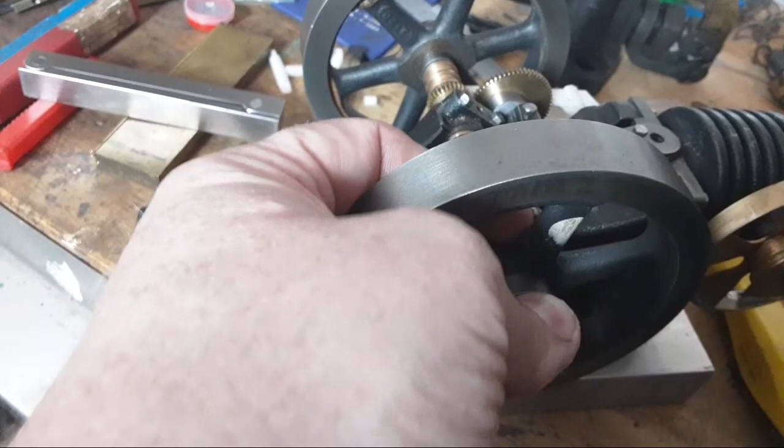This one, I ended up rebushing again for about the 6th time. And it's a fraction loose. It's not terrible, but this key doesn't tighten up. So you're gonna have to make a new key for this one.

Next job, I guess, is to bolt the cylinder head on. The head's had a bit of a job done on it. I don't know if you can see that. You probably can, you probably can't. You're not supposed to see it.

Drilled these 3 holes and didn't think it through as well as I should have, and really drilled them wrong. 2 valves and a port for the spark plug, which goes between these two. And then there's one valve here and one valve there.

This one turned out alright, but these two really weren't good because I only did them in the dividing head and the milling machine, and that's not how I should have done it. So...

What I ended up doing was make a top hat sort of section piece of cast iron to press fit in there, nice tight press fit through there, and then it's got a top hat section with a bit of a lip, so that it actually seals on the front of the cylinder. So...

That repair's been done, and what I'm going to do is set this up in the dividing head and just put an index mark on the 3 spots. Probably drill the spark plug hole through anyway, because it's just a 1/4 inch drill.

And then I'll make a mandrel. I've already made a mandrel actually, with bolts on these 3 holes, and set it up in the 4-jaw on those 2 centres and bore them through, or drill and ream them right through, and then machine the seats on them, and they should all be concentric.

The push rod looks like this, which is just a piece of square or a piece of rectangle with 2 brass guides on it and a fork on one end. I've actually got a huge big ball race to do the roller, so that might be a good way to do that.

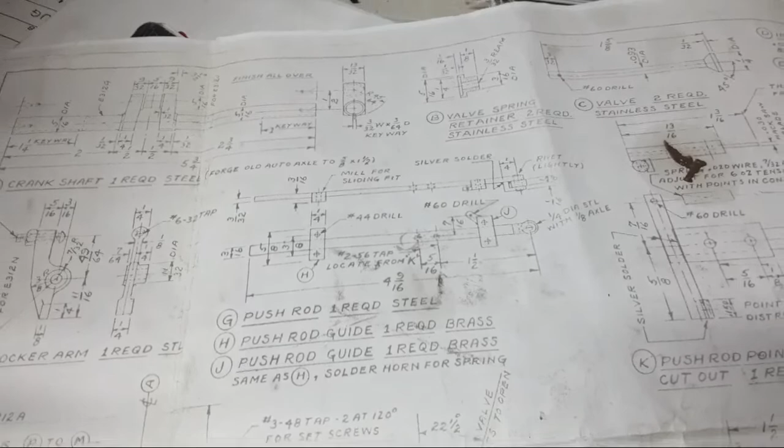And 3 AM for the live stream's crazy, Frank.

A very excellent set of parallels there that John Creasy made. Just shout out to him, because they really are very good and get used all the time.

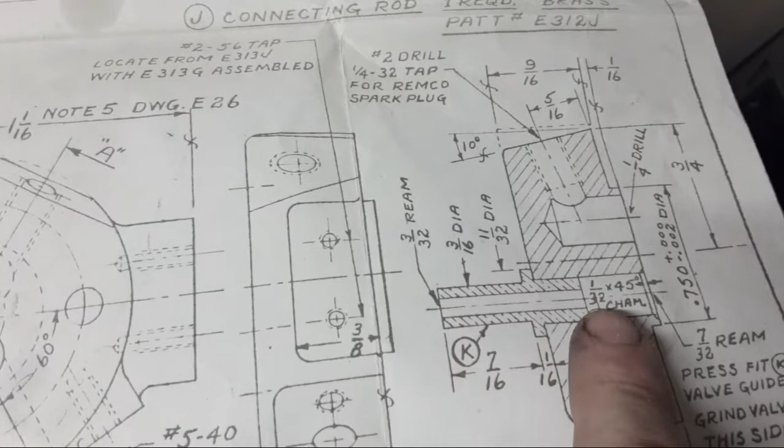This drawing's upside down. There we go. Cylinder head drawing. So coming right through, there's 2 holes here, which is 7/32 or some stupid size. Then there's 1/32 by 45 degree chamfer for the seats.

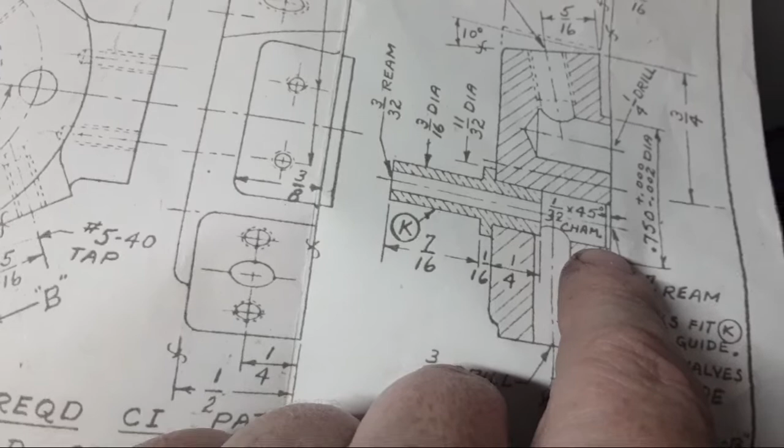And then this has got to be concentric. Go Create. Hi Nigel. This has got to be concentric too. So this is where it gets complicated, because this surface here and this hole need to be concentric, because this hole here needs to be concentric in the middle of this one. If they're not, then you get valve leak, as anyone who's ever built one of these knows. And I'm sure we've all built one that doesn't work.

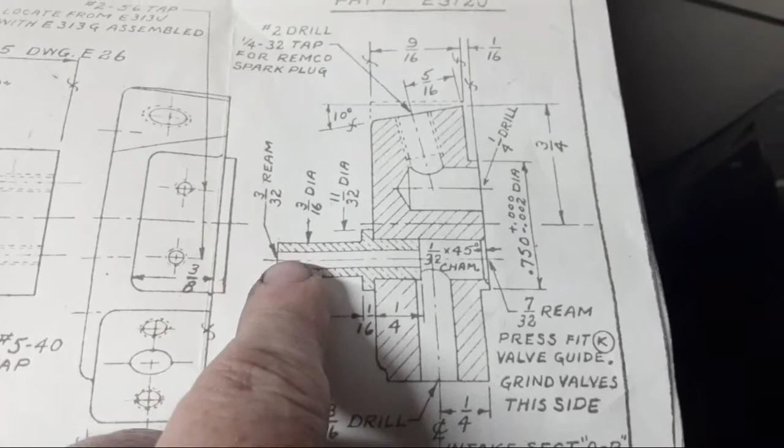So I think the best way to do this is to get this piece and drill it all the way through and ream it, a 3/32 reamer. Then set it up between centres with a little dog on it, and machine this side to press fit size, accurately, between centres. Turn it around and machine the other one. So I think that's the way to do that, and then press them in. So if anyone's got a better idea, good on you. And share it with me by all means, but at this point, that's what I'm going to do.

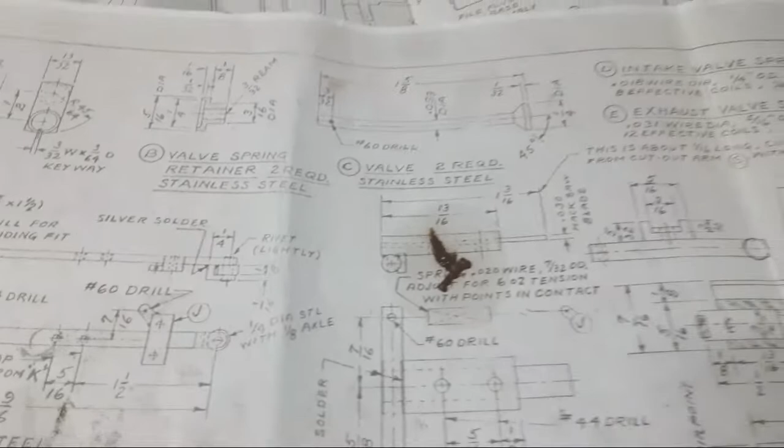If we get those in there and a few holes in it, then the head's basically finished. And we can move on to other extreme atrocities, like these valves. Not got a great love of machining something 3/32 diameter, 1 3/16 long, but I guess it was the first time for getting everything right. Anyone who's got a better idea on that, you can make them up out of 2 bits and then remachine them, but doing them in a collet's a bit of a problem. I think they're best done between centres too, because I'd like to set them up twice.

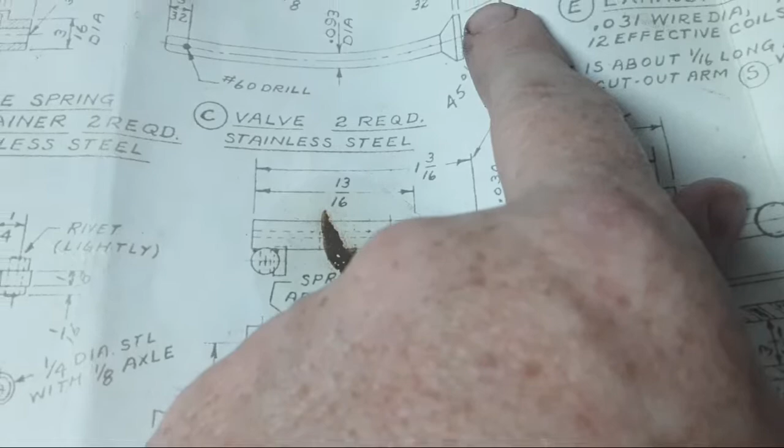So with the Lorch, this has got to be machined with the compound. So I'd like to get them both right here, between centres, the right diameter here, and then swing it round to 45 degrees and finish this detail on the end. And then put them in a collet and machine this end off and this end off. So that's fun. And then there's a couple of those little collars there which hold the pin in place in the spring. Anyway, then we can pressure test it, I guess.

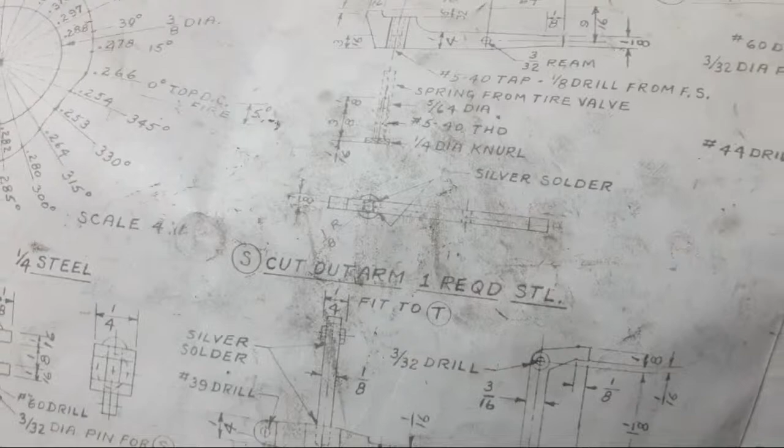I spilled Vegemite on the plans. I don't know what that is. I reckon it's grease or something that's probably been in it. It's probably even part of the... I don't think it's part of the photocopy. It might be a moth or something that's squashed there. I don't know. Could be Vegemite.

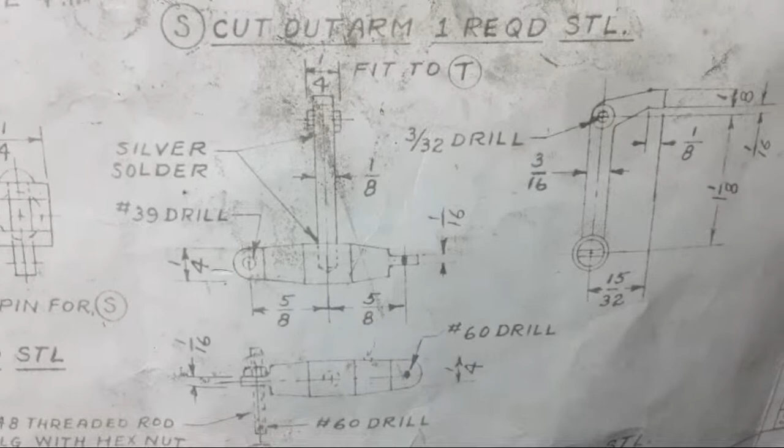So there's a fair bit of work in it yet. There's this rotten little cutout arm here. It's got to be made. And there's this governor weight yoke, which isn't fun. And then there's some governor weights that look a bit like this. And I think the only other bits on this particular drawing that we haven't made are the rocker arm.

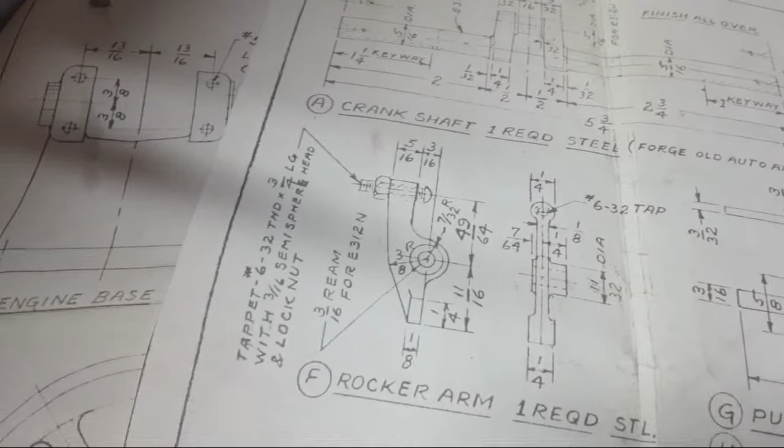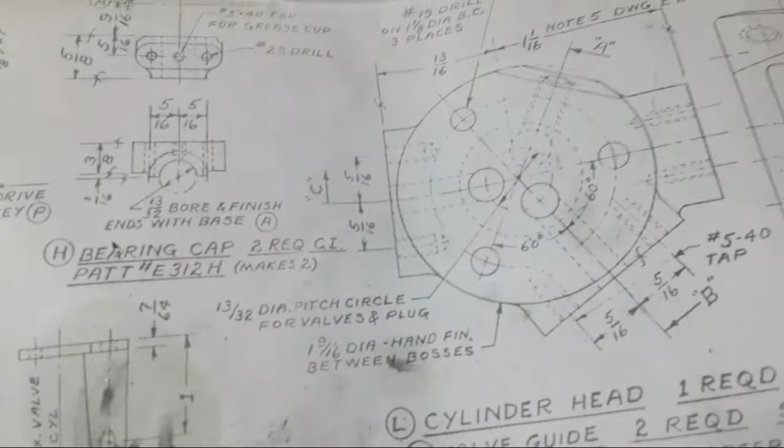And the points and catch plate and everything there, which goes on the push rod. This one goes on the push rod, and this one goes actually onto the block with the spring in it. So a bit of work in all this stuff. It all sounds pretty quick, but if we've done that, the only thing to do on this particular drawing then is this atrocity here, which is the rocker arm.

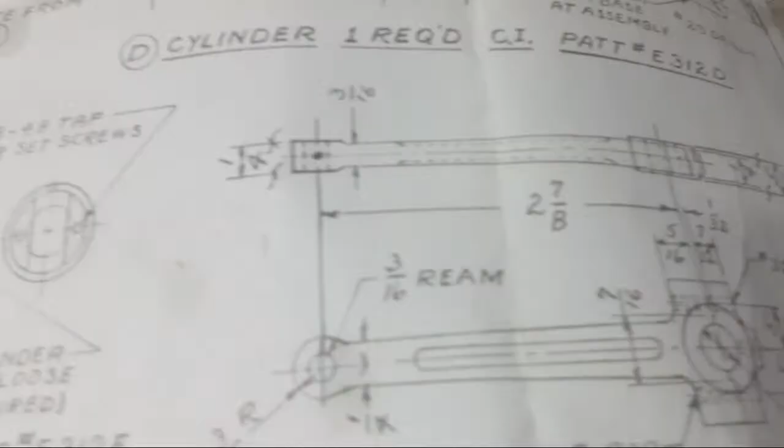Rocker arm bracket. One required, brass. Oh, brass isn't so terrible. We can make one of them out of brass. And this bit, which I'm not really in love with as far as a thing to make. And this bit, which I'm also not in love with. Before I do that, I've got to run a lap through this cylinder and make it nice and parallel.

So, anyway, that's what's been happening there. Two-piece valves are definitely an option. They're fairly long and fairly light, and I've actually bought the materials to make them out of two-piece, but still got to get them concentric, and holding them in a collet to machine the heads doesn't sound like a particularly good idea, but I don't know. Have a think about it.

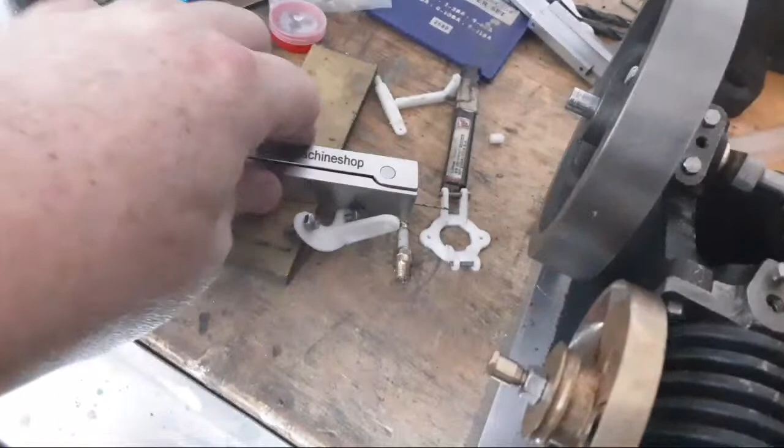There's actually a sine bar sitting there with a drill in it, which I think we're finished with. And I've lost. I completely lost that. Wonder where that went. Crap. Did it fall? Did anyone see where it fell?

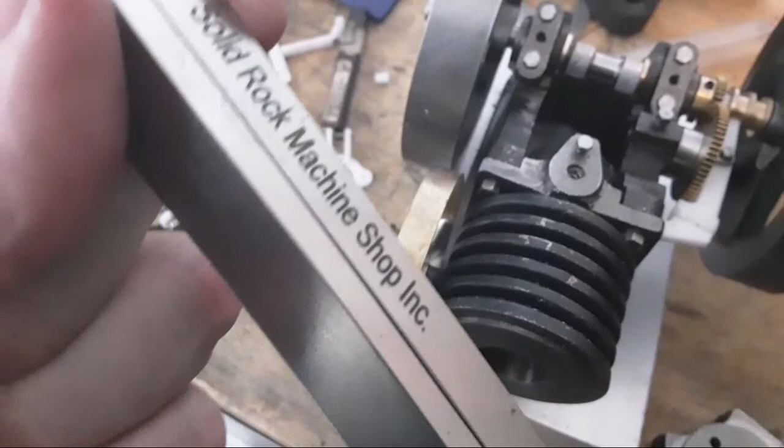There it is. It's out of my number drill set. Any idea where my number drill set is? Yep, zero idea. We're going to put it back in the sine bar. This is my solid rock machine shop sine bar. It's actually seen a bit of use. It does get used quite a bit.

And that drill is exactly the right thickness, or close enough to the right thickness to get them both the same, to set up the tapered keyway in these flywheels. They've actually got a tapered key in there, which is quarter to the foot or something, eighth to a foot.

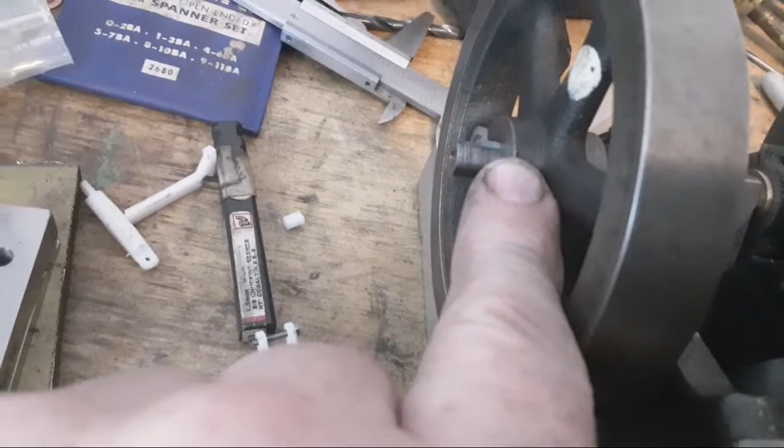That one's tight. No, this is the loose one. Put that there and we've lost it. This one, I think this key's just had too much off it. It's just a fraction loose. So the key's got a taper on it, but so has the flywheel. So the flywheel's got a taper in it as well, to match the key, and that's what keeps them tight. I think that's the secret to that.

So I'd like to think I'm halfway with this, but there's still a fair bit to do. We've still got to have oiler on top, conrod and piston, all the governor bits, push rod and rocker and head and everything. This has got a bit of a wobble in it. But anyway, it's only a pressed in fan. And that runs on a belt on here.

So that's what I've been sort of doing, and probably more than I should. I probably should leave it alone for a bit and go and do something that actually matters. But it's good fun, and it's coming together all right. So while it is, I'd like to keep going at it.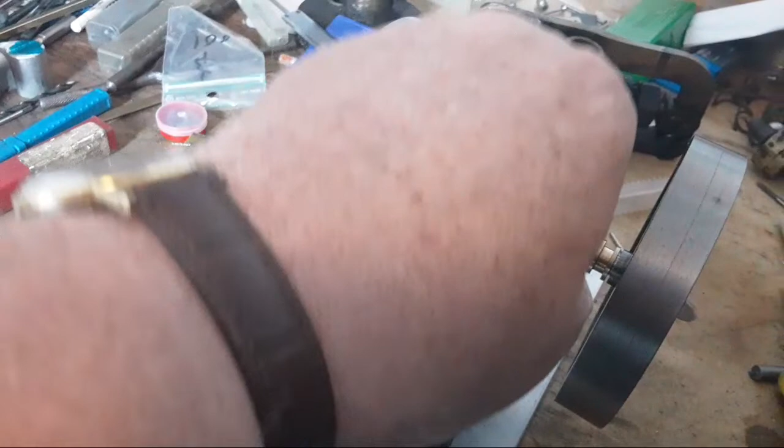That looks better. They need to be stuck in with Loctite or something before the bigger threads will undo easily. Bigger thread than a little thread. I actually just used a steam gasket sealer for this one. This one works. Haven't done this up. So it's just got a little cap on it with a thread in it. And these are just the same. Anyway, it's slowly coming together and it's a big job, but made reasonable.

I think Stefan's too busy. We're all too busy for this sort of messing around. But I had forgotten about the steam engine. I'm sure it's still sitting on the shelf somewhere. Now we're here, we might as well remind him. Touched it yesterday.

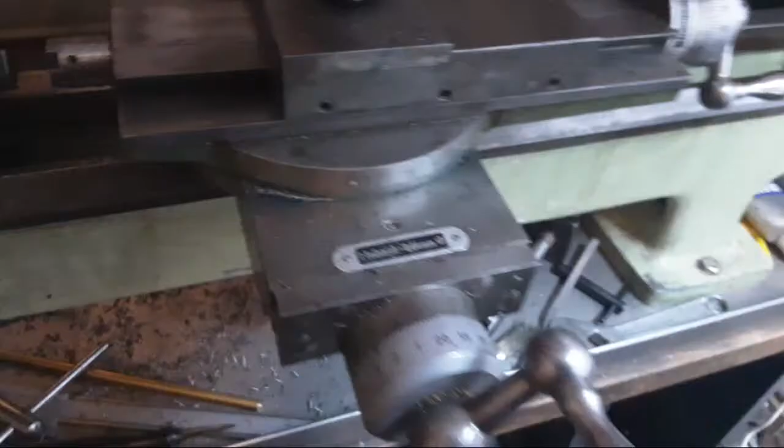Probably don't do this because it's not a good idea, but there's a broach in a tool post for putting slots in flywheels at an angle. I'm not convinced that that's the correct way to do that, and probably you shouldn't do it. So you didn't see it here.

I need a new belt, and this situation's getting a bit dire with this. I ended up putting a bit in it and shortening it up. So this has got that many joins in it now. One, two, three. I didn't tell you to do that at all. You do that at your own risk, but I bet you've thought about it. There are reasons why a leather belt is a smart thing.

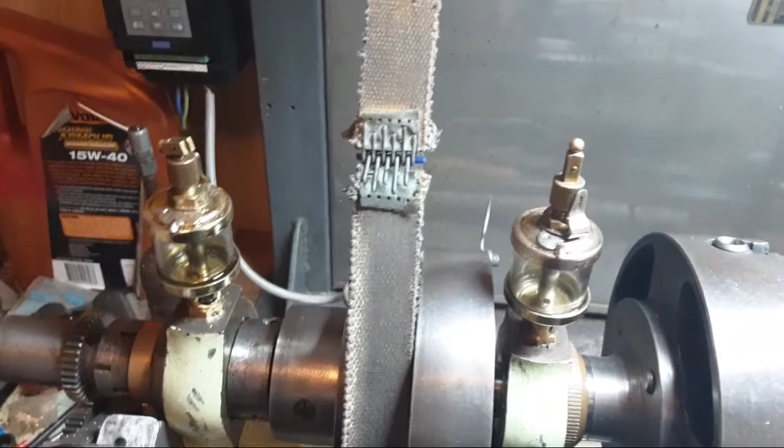That's probably why Bruce was trying to ring me yesterday and I didn't get back to him. So I will ring him and ask him.

There is a product called, it's a very good urethane product called, oh my gosh, what is it called? We use it for leather goods and things, but it's used mostly for horse harness and that sort of thing. It's a composite product. It's very good. And I think it would join okay with this. The issue with putting a continuous belt on it is I've got to pull the spindle out every time I want to adjust it. And there's also no adjustment for tension on this lathe. So we've got a fixed shaft and a fixed shaft.

Tell him to buy one off Myford. They're cheap. Like seriously, so cheap. Yeah, I missed a call from Bruce, and it was the middle of the day yesterday, and I never had a chance. I'll ring him one night.

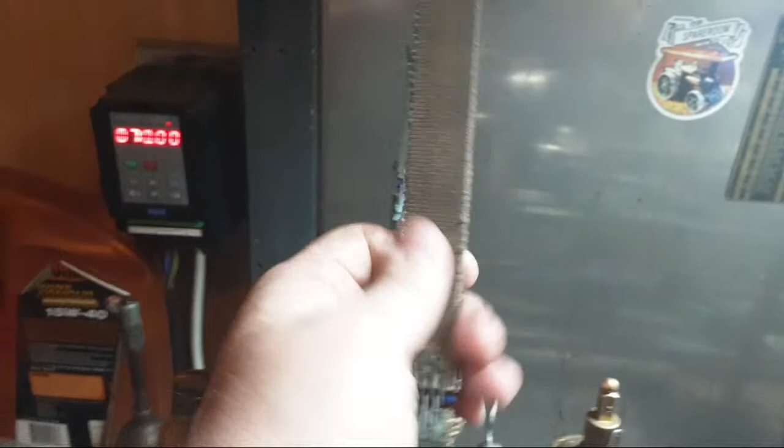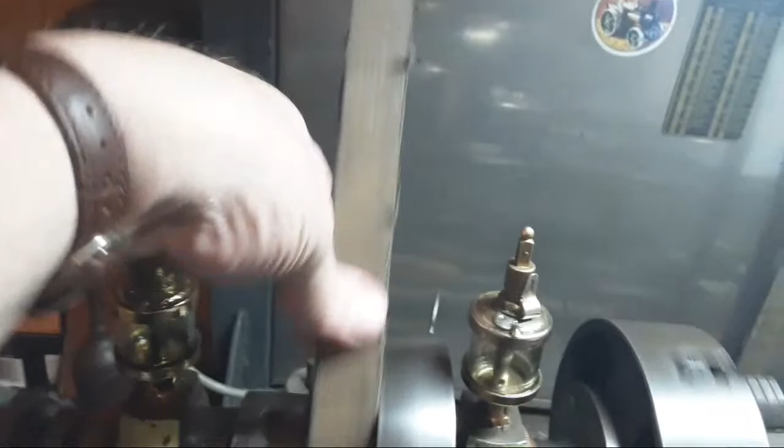But there is a very good product, I think, and I'm going to try that because we can get it readily available, and it's about the same size. It's available 1" by 8. I think it's an American size. So that's roughly the same size as this, and I think it would probably take clipper fastenings okay without too much trouble because it's reinforced inside. So I'm going to try that. Watch this space.

Anyway, I'm going to tell him to go to Myford and buy a couple of these oilers because they're cheap. And as for flat belt, I think we have something, but I'd better do something about that fairly quickly.

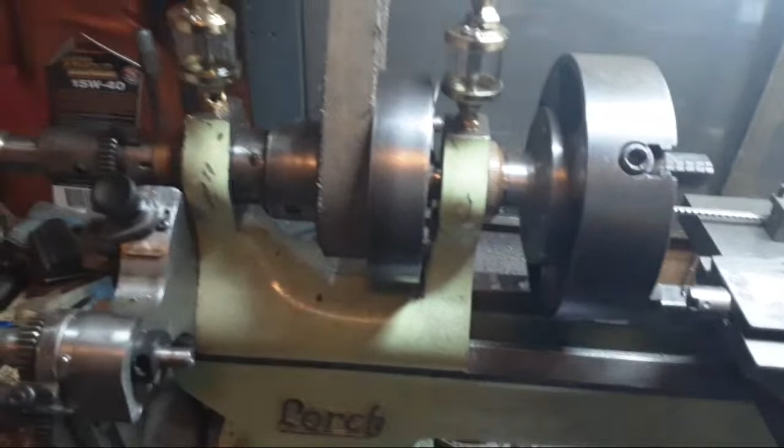I'm usually pretty good with flat belt and I don't mind it, but this one's been joined so many times it's looking a bit ordinary. I don't think I can get a whole lot more out of it. It ended up just busting off and I've sort of sorted it out. It's just rotten, so it's broken at the end of the clipper. So anyway, it's fixable. There are more joints in the belt, yeah.

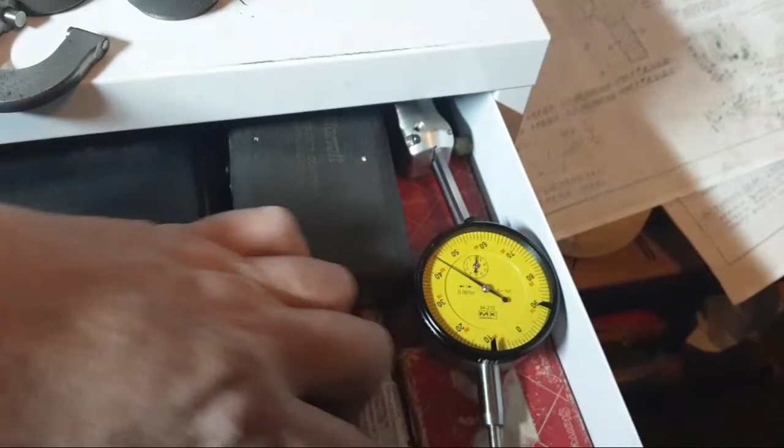So that's where we're at. Really need a new dial test indicator, and I guess I'm going to buy a new test indicator. I've got an MX indicator there. I'm not all that in love with it. And I've got a digital one, which I'm also kind of not that in love with either.

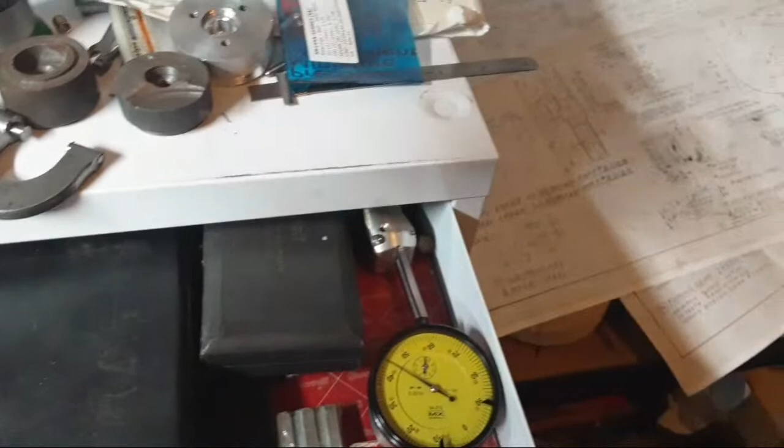I have this, which I don't like, as far as indicators go. This stand here is very ordinary. It's a knockoff of a Noga, only it's tiny. It's made in China. Not really in love with it. And this is broken here. A flat chain.

So I know someone who's got plans on a website for making bits like this for this, and I don't know whether that's what I want to do or whether I want to put a fine adjuster on it and make something decent. This is a Federal indicator. It's half a thou. It's quite a good one. I really like this as far as sensitivity and calibration, and it's a scale that I understand and it works. It clicks through. And it's also reversible, so it's quite a nice little indicator.

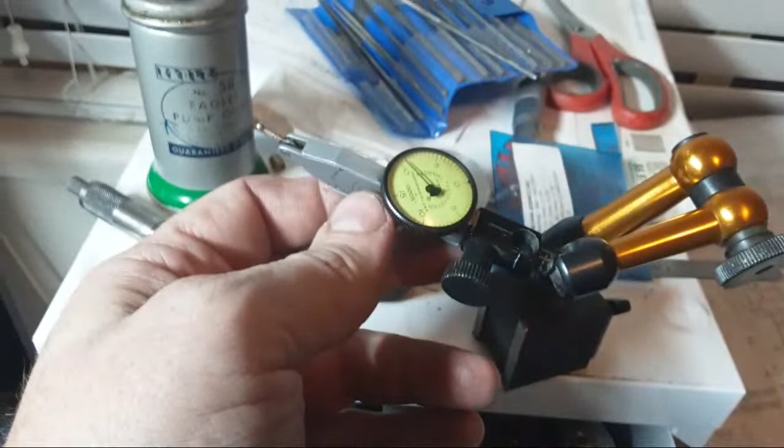But this is bent. I don't know if you can see that. It's got a bit of a bend that way, which isn't good. I don't know whether I pull it apart and try and straighten it or whether we fix it. Put the fine adjust on the base. Yes, I've heard that. Yeah, I don't know if I'd even buy a Noga. This size is very good for me. This is about the size I like. But maybe I should sit down and make one, but it's a project. And that's a bit of an issue.

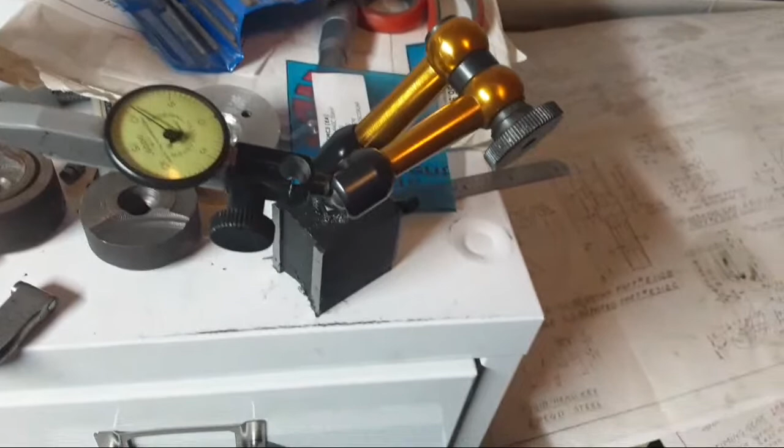This is my measuring tool box. There's an empty box. We could put that indicator in this empty box, I guess, where it belongs while we're doing it. There might be a reason why it's not in the empty box. Yeah, there is too. Yep. That's not really the answer. I don't need another project at all.

These are kind of good. There's one on the bench there somewhere. But these are something I use all the time. They're really good. Someone had a question about small hole measuring. These are all right. But if you want to measure small holes, now this is kind of one of the best things I ever bought, right? They're only cheap, and they are imperial. So apologies to all you metric people. You can buy metric ones.

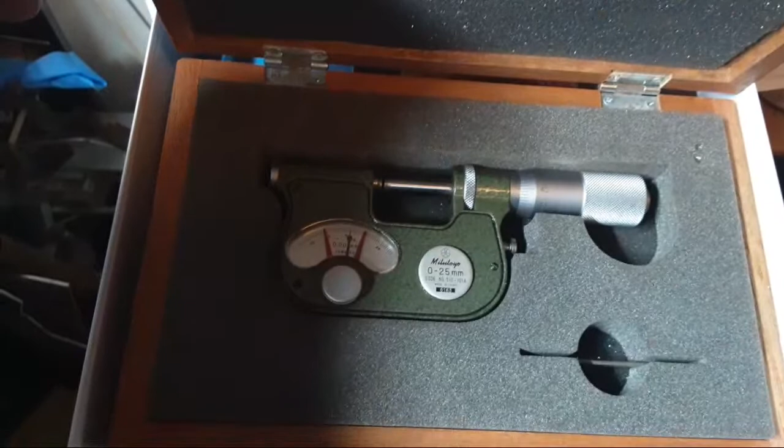If anyone wants a nice microns indicator, I'd swap it for the half thou version. A set of drills is good too if they're nice and clean. But that was a luxury purchase, that set of pins, and I use them all the time, more than anything else. Also be keen to get rid of this, which is neither use nor ornament. Someone's got a museum. Who sells gauge pins? I think mine came out of China. Or actually mine probably came from M&S, but they're Chinese.

For through holes, this is excellent. And where this is really excellent is for things like, you have to get this open. They're 1 thou. Now you can buy different sets, oversize and undersize. I'm sure Stefan would know more about that than me. But they're in 1 thou steps from .061 to .250. That set. And the next set I want to get is from .250 to .500. Or .251 to .500.

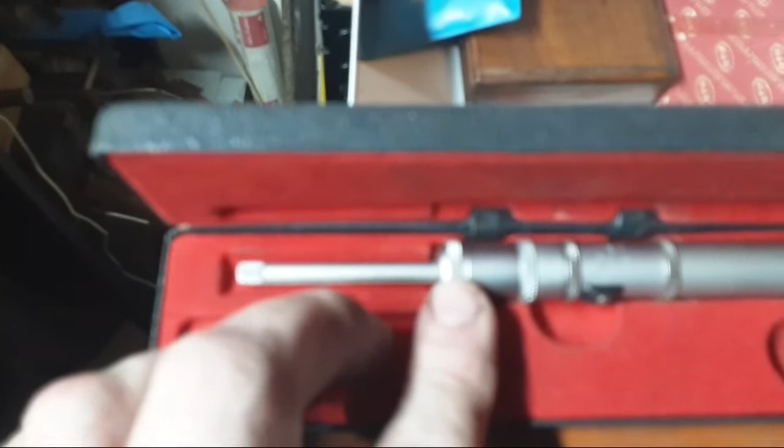This is very useful for measuring crown stem tubes on watches. But yeah, they come undersized and oversized, I think. Really good question what they are. I think they're an undersized set. This is a special micrometer. I guess you've all seen this. It's got a pin and a flat surface.

But this is quite a good thing too, because it gives you the reading on the taper.

Take care, JB. Don't work too hard.

And that gives you a reading in a window. 42 thou. Which is very useful for measuring a watch crown. So there's one of these at work, and I've got another one that belonged to my old man. But its actual use is for measuring spray gun nozzles, in case anyone was wondering.

There's always half a dozen of these poor little imperial micrometers kicking around. This one I don't use a whole lot because it's getting a bit hard to read. It's pretty well battered about. I have a Starrett, which gets used a lot more because it's a much easier thing to read. It's probably the easiest micrometer I've got to read.

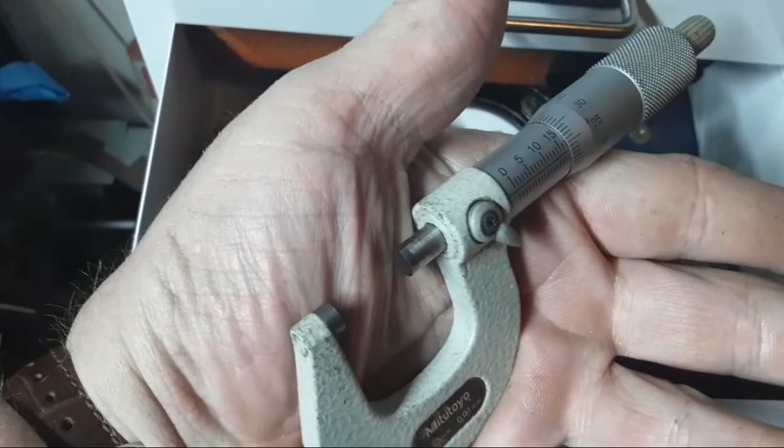I've got a metric one too, which is a Mitutoyo, and that's a dog of a thing to read, to be honest. It's very easy to get mixed up. Because that line on there, and I don't know why this is, someone might be able to answer this. That line, when this comes back to 0 setting there, the line disappears. So you're only sort of guessing which line you're measuring from. It's a very disconcerting thing. Don't know why that line disappears, or it seems to be on the inside of the thimble.

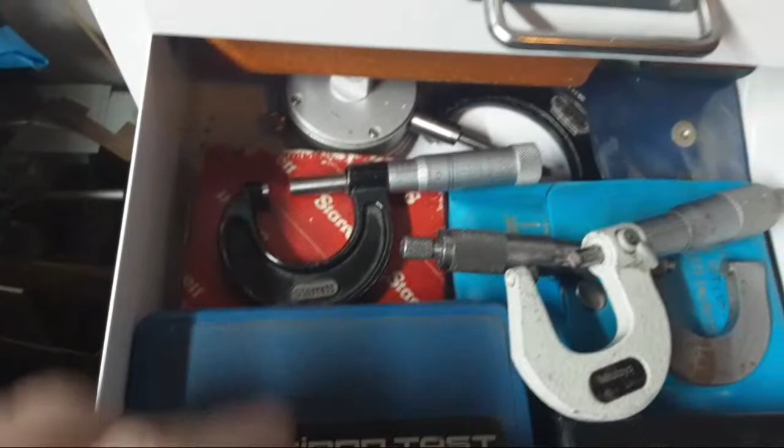I like a decent micrometer. But I sort of feel a bit like I should sell all these and buy a decent digital micrometer at some point. But this is the one that gets used mostly for this sort of work. And this one gets used a lot because the lathe's metric. In the top there's one of these, which probably also should get sold, to be honest.

That's the other thing. Dances with Aardvark says that I'm getting old.

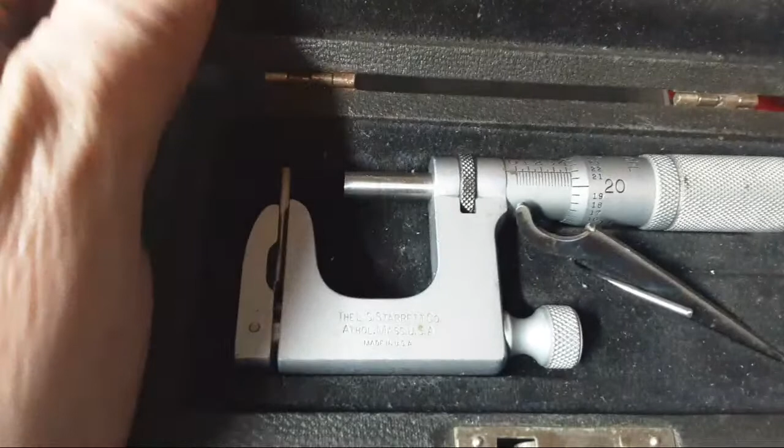This is a pretty nice micrometer, and for a lot of things this is quite useful. I haven't got all the anvils, so it'd be much more useful with a set of anvils. But quite often I just use it with a gauge pin. Is that sacrilege? Probably.

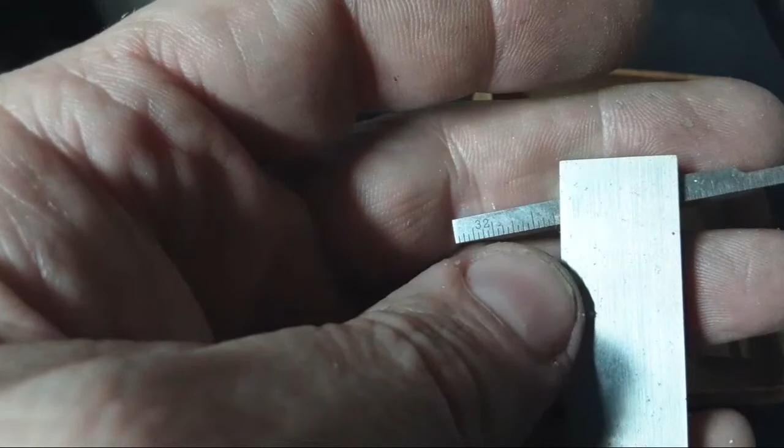A lot of these little red boxes, that's a toolmaker square, which is dusty actually, probably more dusty than it should be. It's a pattern maker square, or die maker square, whatever you want to call it, with adjustable taper. It's a fairly useful thing as well. I use it a lot. Set of radius gauges in the bottom there.

A set of Vanguard angle blocks. They're pretty much useless. My good, that box under there is my good combination square.

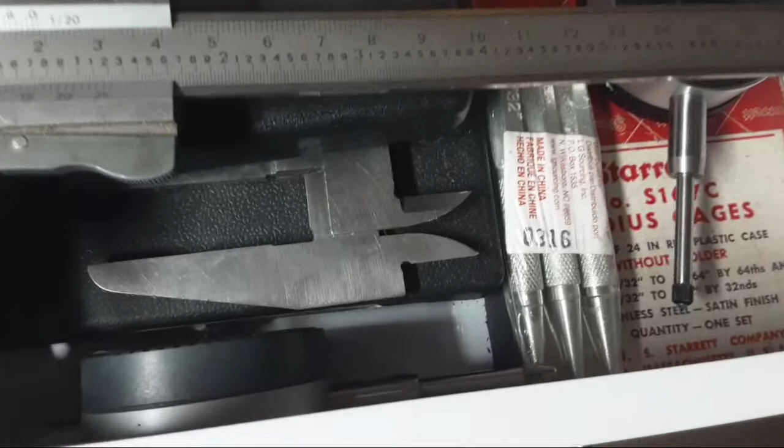I tend to find my go-to is still a decent pair of calipers. This isn't them. These are Minimax. This is interesting. Let's see what else I can find here. There's probably about 4 pairs sitting around somewhere. I won't tell you where these were. It might be better if you don't know. These are Minimaxes. These were Dad's.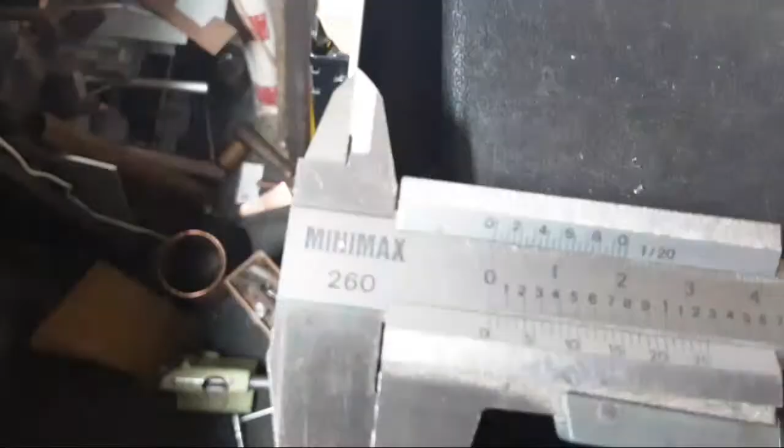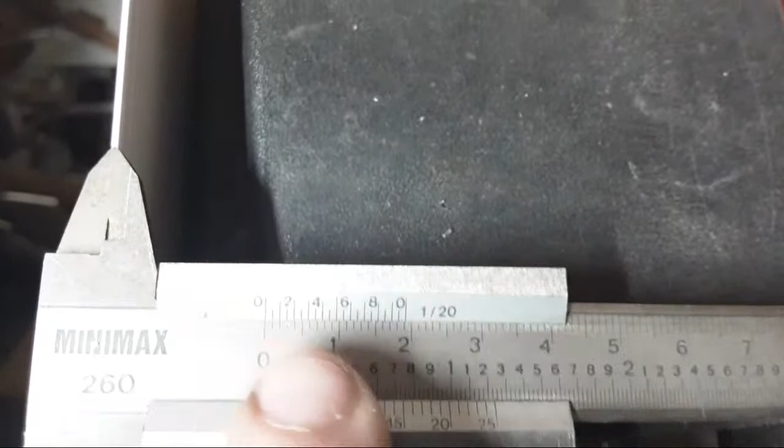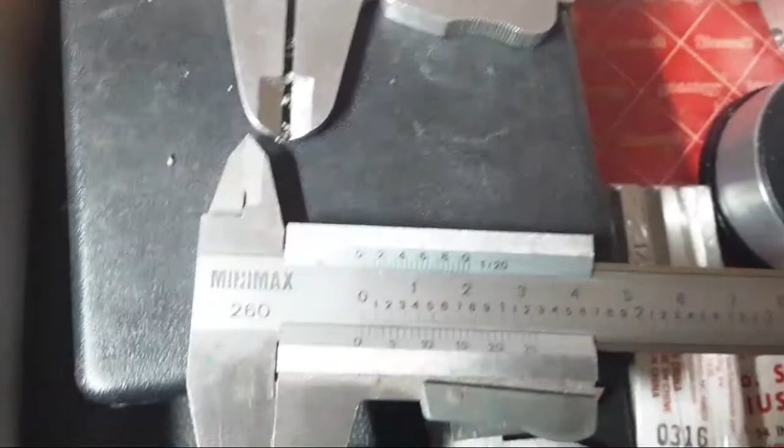Not really in love with these. So they're not a patch on what these are. They sort of look the same. They absolutely look the same. They're not. They're not a patch. The little drawers are okay.

My good set are here somewhere. Just to find them. I reckon they're under these drawings. Yeah, absolutely not under the drawings. Probably over here on the bench. Oh, they could be out on the mill. No, here we go.

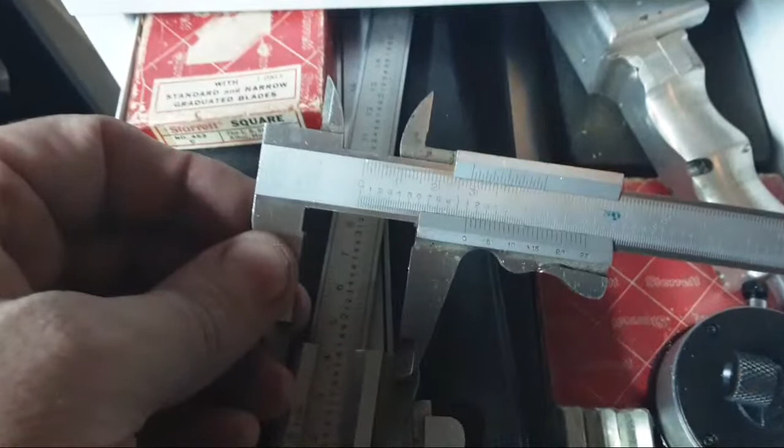This is my really good set, I guess. They're Mauser, from Germany, I think. Really like those.

Morning, James. So that's calipers. Anyway, this workshop needs more organisation. If someone wants to come and do it, you're very welcome to.

This is vernier adjustable, got marking gauge, which was built by a gentleman who entered it into the tool making competition a few years ago. Now I've said that magic phrase, you can think what you like of that, but at this point I'm too busy.

Seem to have a lot of tools that are more or less out of date. Depth gauge, which I depth micrometer, which I use quite a lot too.

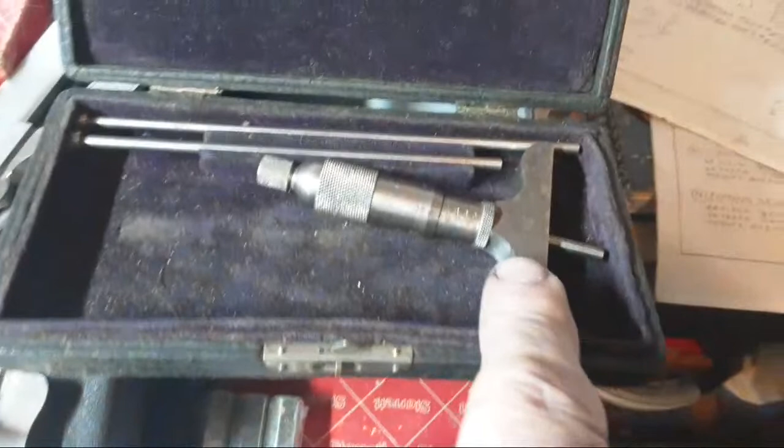I would like very much to make up a Tom Lipton style depth gauge or depth micrometer with a digital indicator on it, and a bar across. That's something I'd like to make. When Joe gets his surface grinder sorted, we might make one of them.

Sounds like a very good thing to have. Much more useful than that.

These drawers, you're right, they drive me crazy. But they were cheap. And when I close them, everything's in there out of sight, which is really nice.

Anyway, that's material storage over there in the corner, sort of. And this is a lathe.

We've run into a bit of a problem with this lathe. It's not really a problem, we're working with it. But every time we want to move the saddle in nice and close, we can't move the tailstock back because of this cabinet. So we've got to take it off. It's a bit of a nuisance. It's not a big job to remove it and put it back on, but we're getting used to it.

Hey Kimber, watched Kimber's latest milling machine video. Hope things look a little bit brighter in the morning.

Anyway, that's what's happening in our workshop.

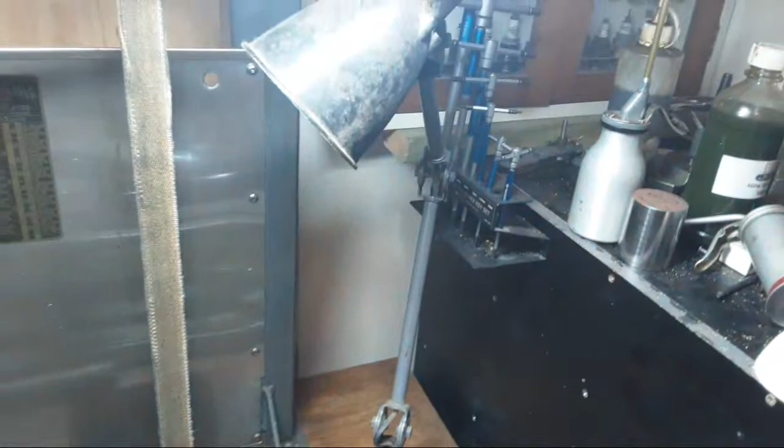Good light's important. This is a really good light. I really like this. It's got a decent arm on it. This one here needs sorting out. It's kind of okay.

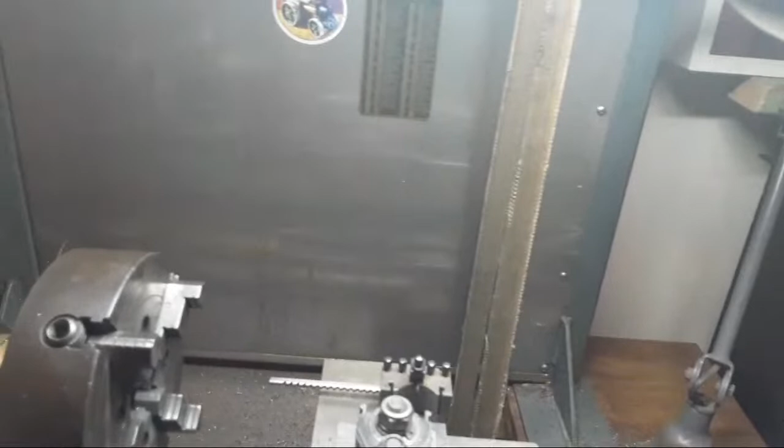And yeah, that's what we're up to. I'm sure everyone else is having productive time as well. Probably more so than I am.

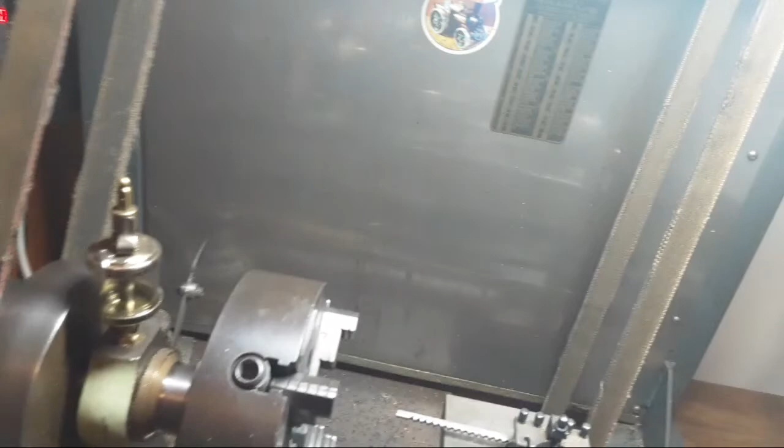I really want to get this engine halfway finished, and then I'll feel a bit more confident. We'll get it running, and then I'll feel a bit more confident about doing some other stuff here.

But right now we've got cast iron here everywhere. This needs a good clean before I move anything, because all I seem to have done in the last couple of weeks is cast iron machining.

So we've got these big drawers, and these are next to useless as well. I'm not even going to attempt to go through any of that.

Anyway, that's what's happening here. Joe's crashing about out there. He's got all the spindle apart for the grinder, trying to sort some stuff out with that. Don't think there's anything particularly wrong with it, it's just got to go through it all.

More updates on that next week, maybe.